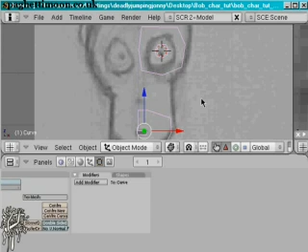Alright, as I said, let's convert this into a mesh. We're already in object mode, so all you have to do is press Control Alt C, and this will come up and convert your NURBS surface to a mesh, as it says. And boom, we no longer have a NURBS surface, we've got a nice sturdy polygonal mesh.

So what we're going to do now is connect these two up. The reason I used NURBS to create this is because it's kind of fiddly if you're going to create a complex type of plane like this. So we're going to use something very useful: create edges and faces by going to Edit, Edges, Make Edge Face, but I prefer to just use F as the shortcut.

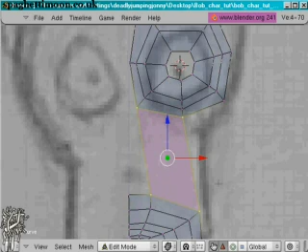So let's connect up these. As I mentioned in the polygonal fundamentals, it's a good idea to stick to quads, and that's good for this model. So what you do is select 4 vertices, then press... oh, that's strange, it shouldn't be concave at all. There we go.

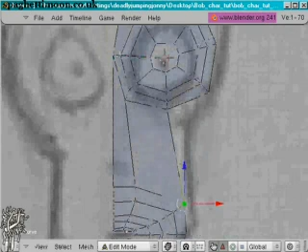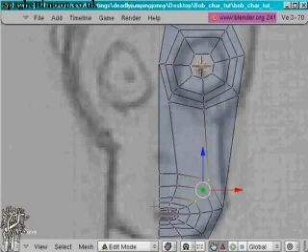And what we're doing, you might get some fairly ugly geometry, so you'll have to do a little bit of tweaking. But that will be changed when we sort out all the faces we've just been making. So that's okay, a bit ugly. You might want to do a bit of tweaking just to sort most of that out, as best as you can, I suppose. Just rotating and moving.

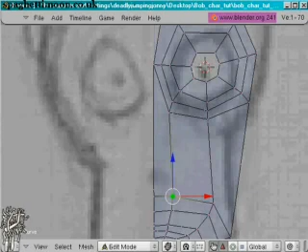Anyway, the geometry we just made is pretty barren. So let's go into Edge Select mode, Control Tab, Edges, and select these edges from end to end. We can use Box Select, I suppose, because we're going to be subdividing this from end to end to make it a bit more detailed. We're not going to get any discrepancies like triangular faces, because it's just straight vertex to vertex.

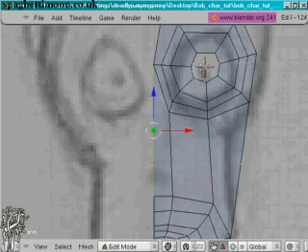You're not affecting other geometry that's superfluous. Like if I was to subdivide that, you see we've got some nasty triangular faces that pop up. But since we're doing it end to end like this, we get a nice straight line, well, a line or a loop.

Okay, so let's think about how many subdivisions we want to do. I'd say we should really keep up with these vertices here, so that's 1, 2, 3, 4 subdivisions. Press W to subdivide, then subdivide multi, 4 cuts, and that's okay. We better do a bit of messing about with the vertices here.

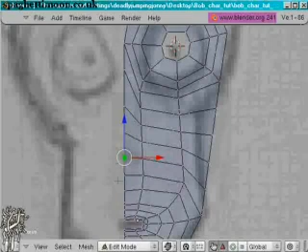And you've got to think that this part's going to be the nose, so we might even put an extra edge loop around there later on. And that's not looking too bad, it's all fairly clean. You see, we're getting a kind of face mask going here.

Try to keep the edges down here lined up with... oh, I've missed it quite badly, the Z-axis. I'm not sure if you can see — oh no, it's okay, it's there. Just so when we flip the face over and do the head, it's symmetrical.

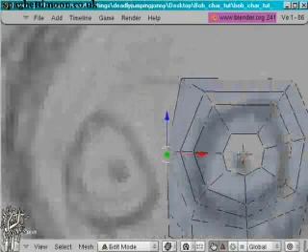Now we've done that, what we can do is start. I've already started a little bit of extruding out of the eyebrow area here. We're going to create the brow on the forehead by doing some simple edge extrusion, so let's get onto that once we've sorted out the geometry of this mask.

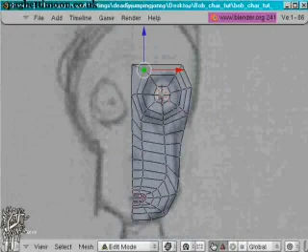That's looking okay, I guess. You can tweak it as much as you want, even this up a bit. Edge select mode, yeah, I think that'll be okay. We might want to add an extra extrusion along there — yeah, in a while, not now though.

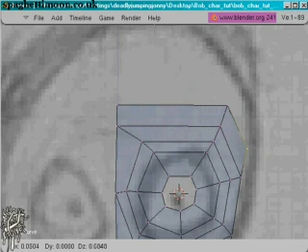So just get your edges up here selected, press E to extrude, right click to cancel it, and you just move the extruded edges up. You can go along the way and tweak it out a bit, and do the same. Extrude, right click, whoops — I'll press Z, doesn't matter, grab Z. And you do the tweaking again.

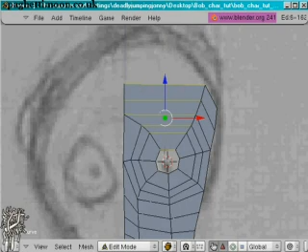You might want to create an extra subdivision along here. There we go. Might even want to put another one in a while — it's all a matter of preference. If you're not comfortable with a particular piece of geometry, just alter it. You can always come back to it, just save regularly.

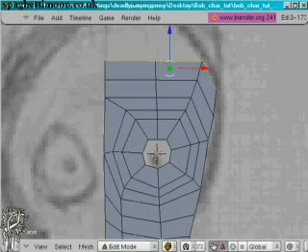And you can go over it again. That's something that could be frustrating if you find that you're struggling with one particular piece of geometry. Sometimes you feel you don't want to go back to it, but you should really keep at it, because it will click in the end.

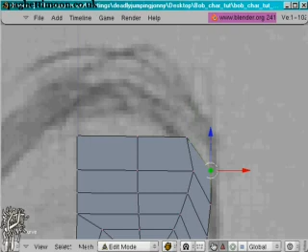And we're nearly finished the head now. That's looking alright. Geometry doesn't have to be particularly dense around here, because there's not much movement around this part of the head. Almost to the crown, I think.

Extrude. You can just extrude along the Z-axis if you don't want to grab it. Alright, it's looking a bit like an alien, actually. Let's move those down a bit. As the reference images aren't law, you shouldn't be trying to abide by them exactly.

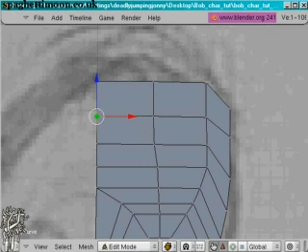Just a general outline will be fine. That's alright, and that's the easy bit out of the way. Now we've got the rather monotonous part of sculpting our mesh into a semblance of Bob's face in the next tutorial.